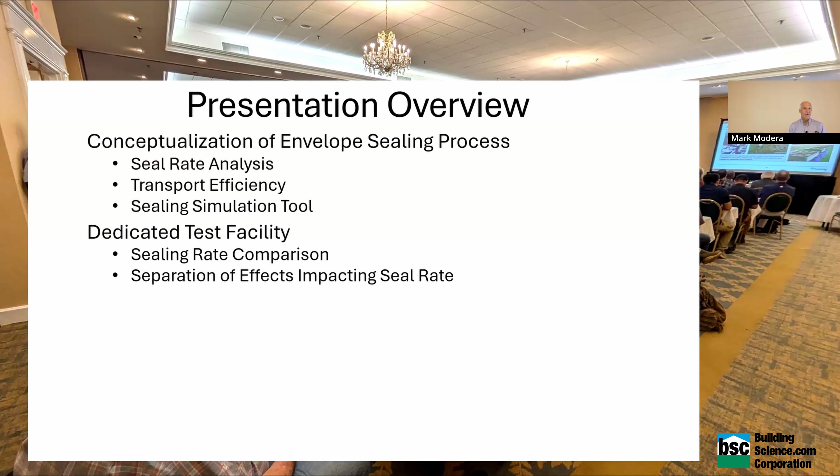Then actually, the kind of interesting thing is in academia, you're always fighting to try to get good technology to do your experiments and all that. I discovered that my job right now, I'm called Chief Scientific Advisor, which means nobody reports to me. I don't have any budget. I don't have any authority. But they all listen to me anyway, which is kind of cool. But I also get the CEO to buy me nice toys. So we got to buy a fancy particle analyzer, and we got to build a dedicated test facility for looking at Aerobarrier and figuring out how to make it better.

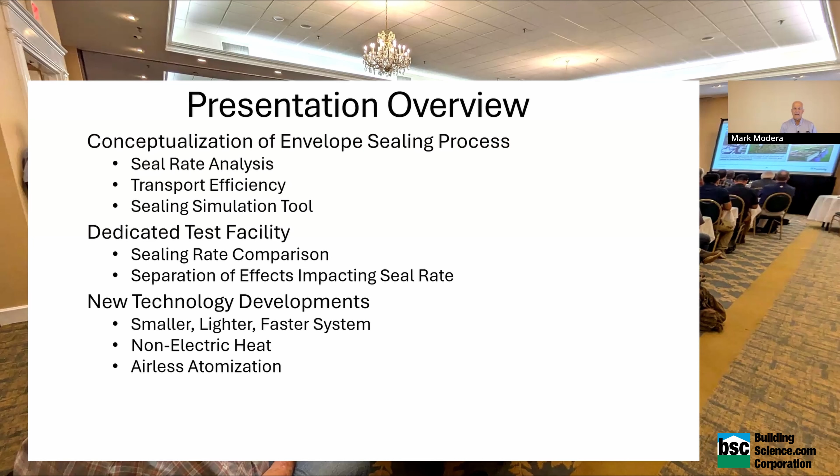I'll talk sort of about where the technology is going. Some of it is here, some of it is not yet. And then a little bit about some new applications. Okay, so this was in case everybody, when they didn't raise their hands, didn't know what it was.

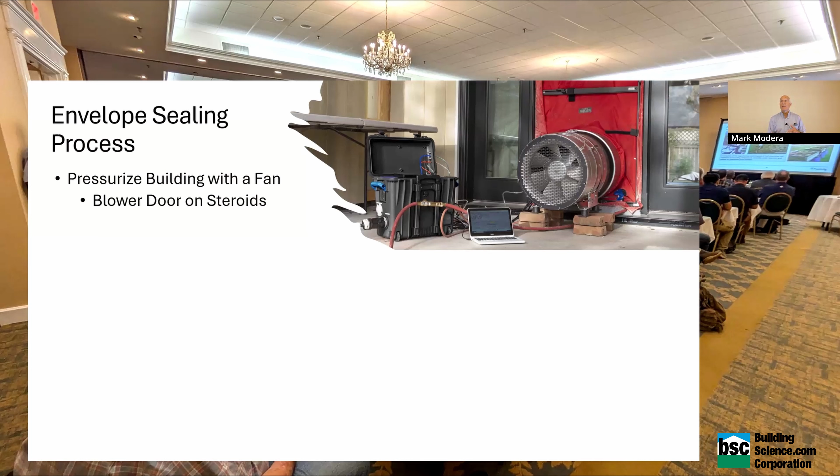So basically, you pressurize a building with a fan. It's kind of a blower door on steroids. And what I mean by that, it's able to produce higher pressures. Blower doors, people are talking about why do you have 50 pascals? It's because blower doors don't like going much higher. That's not true. But realistically, we sometimes want to make the building go to a higher pressure than that, and you have a different kind of fan, right? Instead of an axial fan.

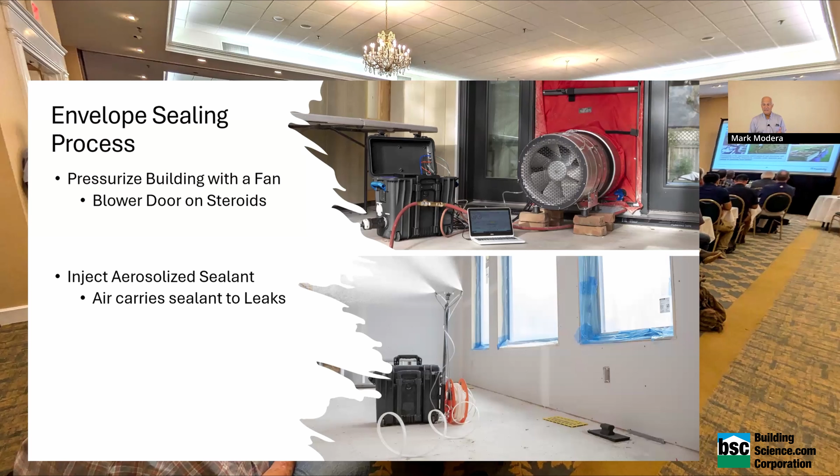And then you spray a bunch of sealant in the building. I mean, it kind of seems simple in concept. And then at the end of all this, or actually during it, you track what's going on. So this sort of taking data like that started in 1997. I have to do a sort of a shout out to Gary Nelson and Colin, that I went and stayed at Gary's house, and he worked with me a little bit because I just had this idea to do this stuff, and was like, well, we can track it.

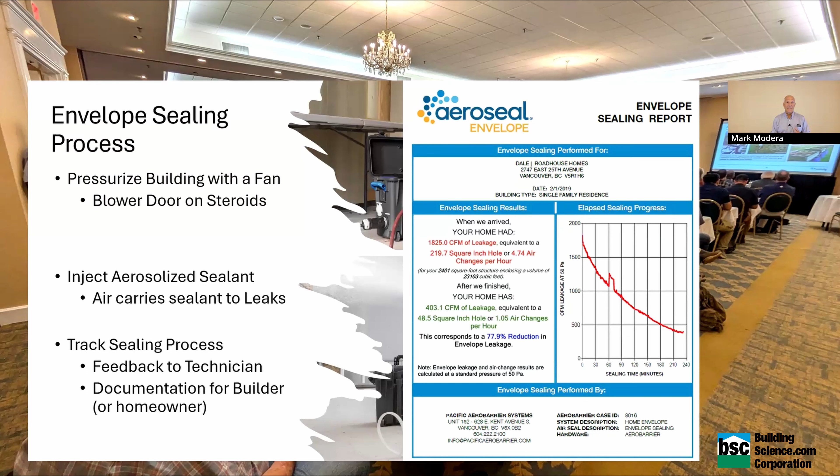And that has evolved into the point where the data on every building that ever gets sealed or every duct that ever gets sealed goes to a server, and we can now look at it and slice it and dice it however we want and figure out how things are going. I'm not controlling or anything. So conceptualization of the envelope sealing process. So this is, I got two equations, sorry.

So I just wanted to point out that if you want to know how fast something is going to seal, we want to know how those leaks have to go from a certain size down to 0 or close to 0. So the rate depends upon basically how fast I can dump sealant into the building. And that's determined pretty much by how humid it is, right? The sealant's water-based; if you try to evaporate too much water, it's going to rain, it's not going to work.

Then the next thing is you have to figure out how much of the sealant that you spray in there actually makes it to the leaks. And then once it gets to the leak, how much deposits? And then how much sealant do I need to seal that leak? And so it's a pretty simple equation, right? We're good with that? The reason I put it up here is I have to do this inside the company to explain to people to look at the big picture.

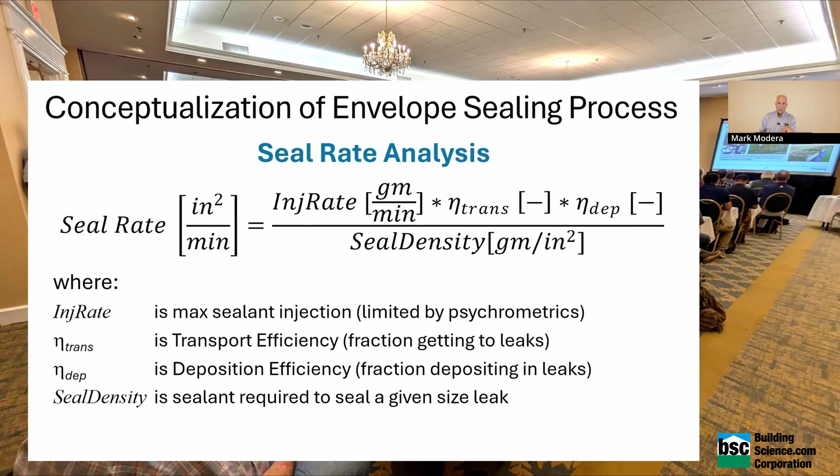I also realize that the way people think about things, they tend to look at the answer at the end. Like, am I faster? Am I slower? And I think that's pretty much useless unless you understand why. Because if you don't understand why, you don't know what to do, what to change, how to improve and all that. So we designed this facility to be able to measure all these different parameters sort of simultaneously to see what's going on.

So transport efficiency, this is a pretty simple concept. If you put a bunch of particles in the air, what do they want to do? They want to fall down. And you want to come up with a way to say, well, how much are they falling down versus going to the leaks? So if you basically say it's a race between getting to the leaks before they fall to the floor, you can actually turn it into a flux. So back to here, I think I go backwards, yeah.

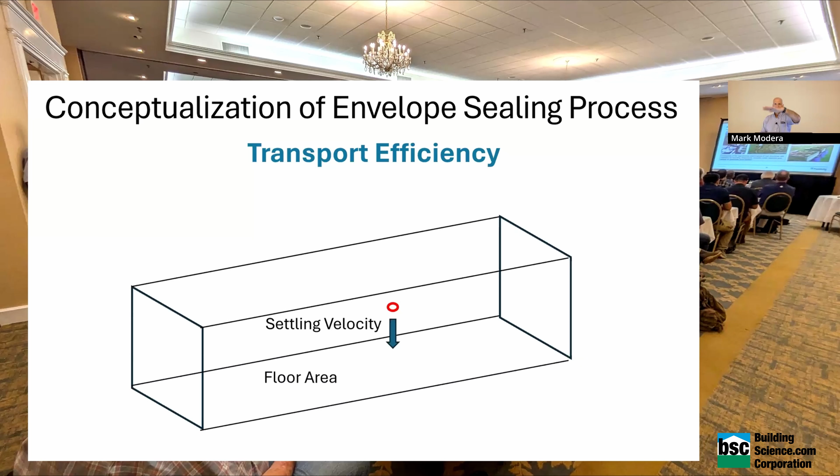Settling velocity is a speed. And you take a speed, multiply it by an area, and you get a flow. So you can say the particles are falling down at the settling velocity to such and such an area. And then you just compare that with how much is going to the leaks. Well, what's going to the leaks is exactly what you're putting into the fan. Otherwise, the building blows up.

So the end result is you get a simple definition for this transport efficiency. And we don't have to go through this, but basically the whole point is just to be able to compare apples with apples. And how do you do that?

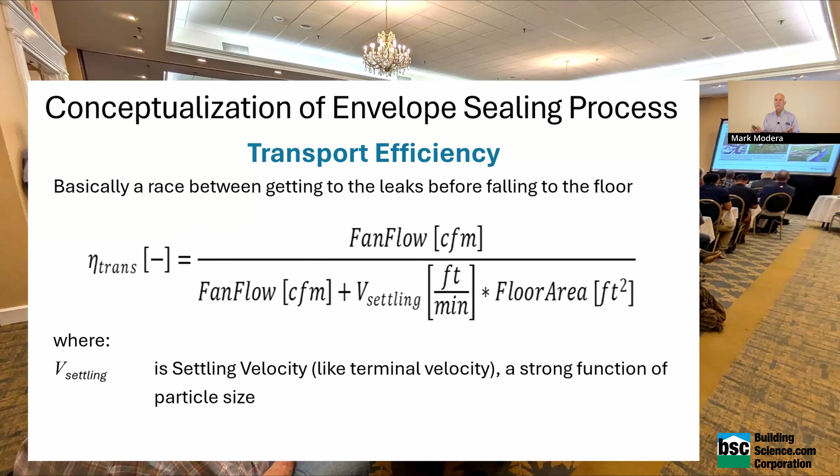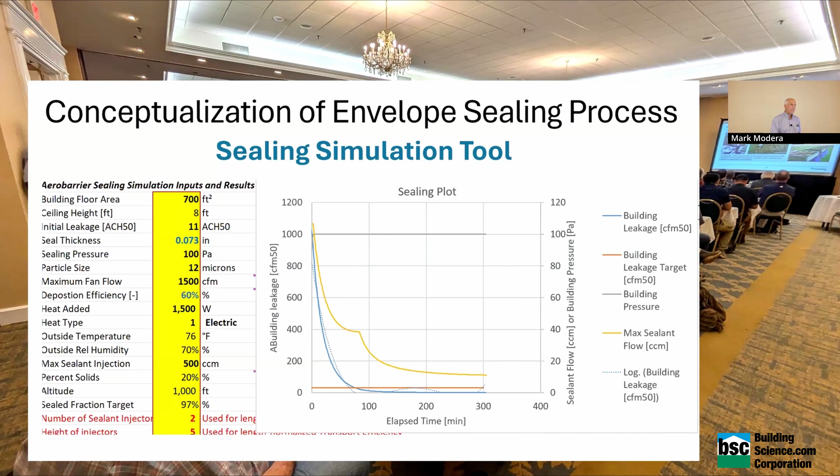So I get to do kind of whatever I want, and nerds tend to do nerdy things. So what I did is I developed a minute by minute or second by second, whatever, model to predict exactly what an Aerobarrier process would look like, and to adjust all the parameters, all the knobs you get to turn, and figure out when you turn that knob, what's going to happen. So I've got a model and I've got a test facility.

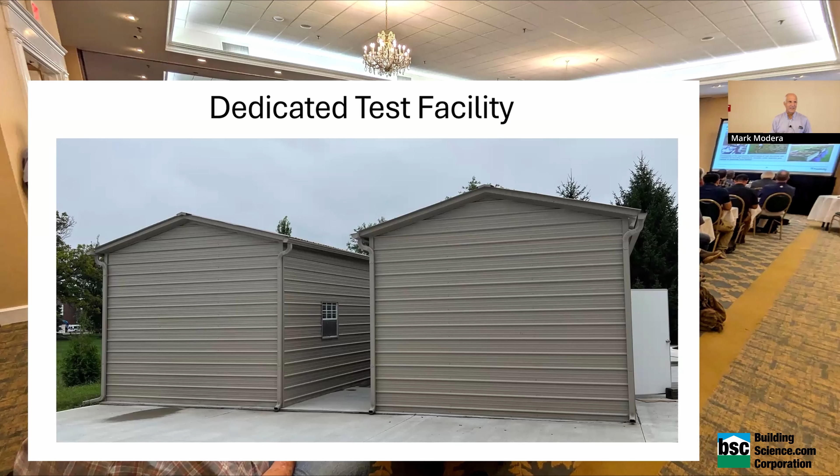So this was actually built. Someone had the bright idea that we should build 2 of them. We have enough to handle just running one of them at a time. So the second building just becomes a staging area. But basically we built a building within a building, and we put in a bunch of spots to put leaks. And basically they just clamp in and out.

And in addition to putting the plates so that we have the leakage and we can take them in and out and measure them and change them and clean them and all that, to measure that transport efficiency, we came up with sort of a cheapo way to do a personal particle monitor. So basically you take a vacuum pump, you put it onto a little box, and you suck the air through a filter on that box. You weigh it at the beginning and at the end, and you've got the average concentration during your job.

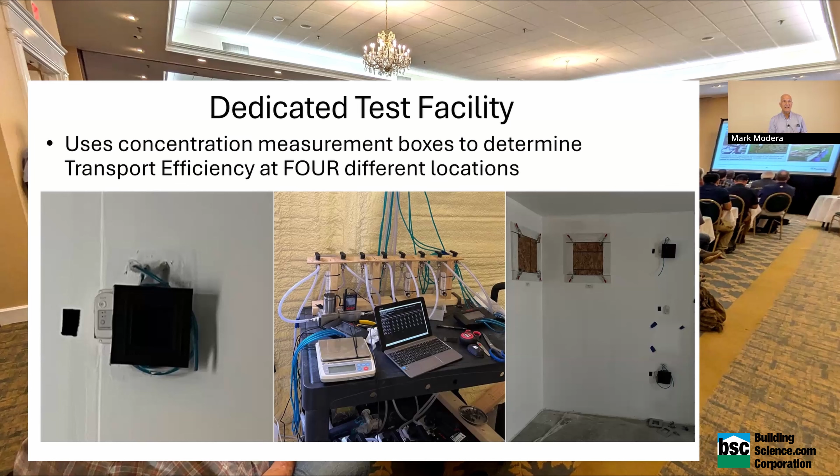And even came up with something that I just filed a patent on, is the idea that you could not only get the average concentration, but you can get the minute by minute concentration, instantaneous concentration from that same box. So I said, go ahead. The filter. I mean, if you have a super, super deluxe scale, I suppose you could weigh the box, right? But it's much easier signal to noise to do the filter.

So these are leaks. And so we make all the same, like there's 20 plates of leaks all through the building. And you'll notice they're made of aluminum. So we also weigh these plates. So we have a scale that's good enough. You can weigh the entire plate before, and you can weigh the entire plate after, and you can figure out exactly how much sealant was required to seal those leaks.

The interesting thing that's not in the picture is we started out with, I guess it was pressboard. And there's a real problem with pressboard, as most of you in this room probably know, which is you weigh the plate before and you weigh the plate after. However, when you're doing the sealing, there's all that humidity in the air. So the plate takes on humidity. Then you have to dry the plate. And if you keep on drying it, you get this exponential curve, not all that much fun. So we threw out all those plates and switched over to aluminum, which I know is not as representative, but is much easier to deal with.

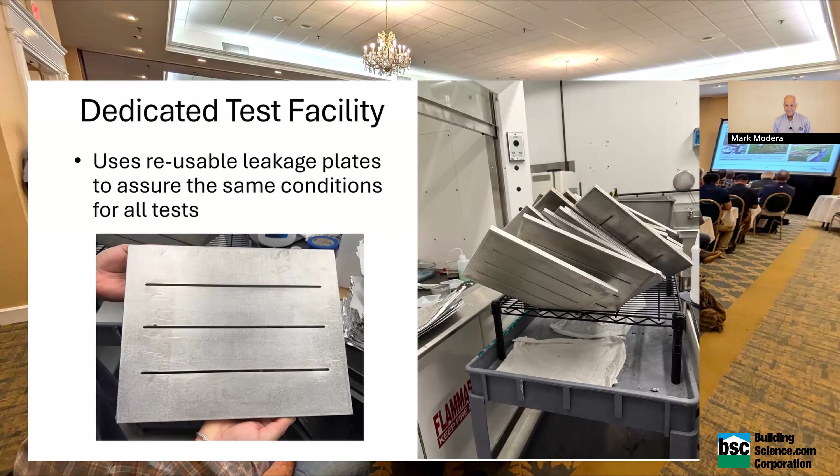Basically, I said all this. We also weigh the sealant, so we know exactly how much sealant went into the building. We know the percent solids. I have this much mass and that much mass.

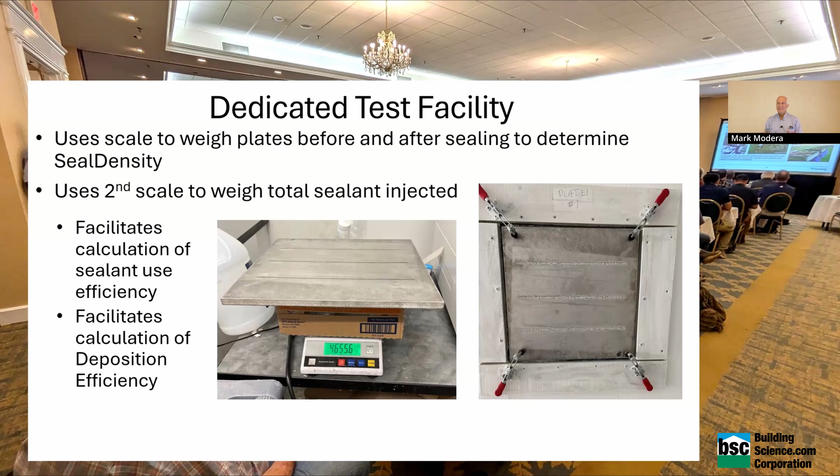There was one other point I was going to make. We talked about embedded carbon, and somebody, his name is Mike Lubliner, asked me, so what's the embedded carbon of your little aerosol thing? And I decided to ignore the energy you use when we're applying it, but in the actual sealant itself, I think we use somewhere between 1/10 and 1/100th of the amount of mass of sealant to seal the leaks, because the sealant goes where you want it to go, as opposed to having to put in like 10 times as much as you need to close the leak. Now, there's a whole thing we could debate about that, but we're not going there right now. Anyway, in terms of materials, it's a much smaller amount of material.

So technology developments. So this is kind of what the system looked like. It had a 220 volt fan. This thing that says Vanair on there, I discovered that we built this. I wasn't paying attention. It is a giant compressor diesel set where you're burning a bunch of diesel to generate electricity, to warm up the air when you put it into the house, and to run all these compressed air lines.

And it struck me as being incredibly dumb to burn diesel, create electricity, then go take the electricity and turn it into electric resistance heat. So a very simple improvement was, why don't we burn the diesel right in the air that we need? And so the end result is, we wound up saving 35% of the weight, a whole bunch of volume, and everything became a lot easier to deal with. So that is currently available.

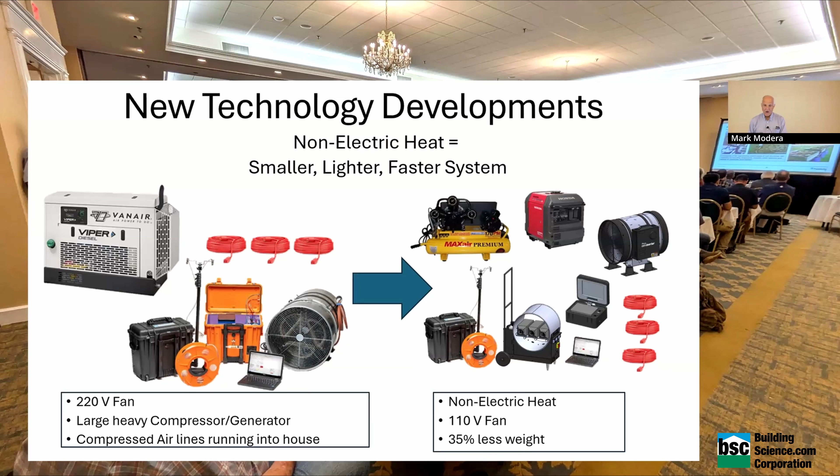The next idea was, when you want to make aerosols, there's sort of two ways. If anybody does paint spraying in their house, there's an air and there's an airless. And air is easier to control in some ways, and you can control the pressure, et cetera, but you have all those tubes you have to run into the house. So the idea was, if we could switch to doing an airless system. The idea being, we don't have to run the compressors, we don't have to run the tubes, any of that stuff. And now you can fit everything almost in a pickup truck, right? Much better way to do things.

There are problems with doing that. Everybody here knows when you have a technology and you've been working with it for 20 years and you have a new one and you start doing that, it doesn't take like 10 days to make it work, right? And so it's been a challenge for me to get people to realize that it's worth the extra effort, because it makes bigger particles. There's all these things that you have to deal with.

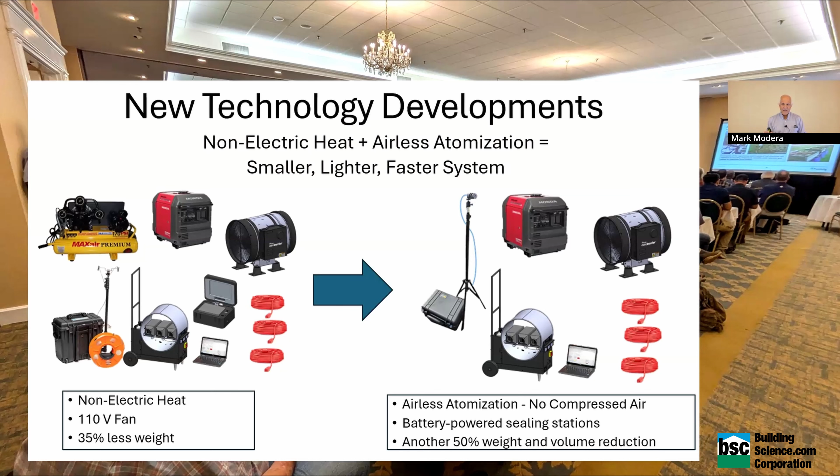So I'm going to shift gears one more time and talk about the test facility, and I'll get back to the air versus airless. So in this picture, what I'm showing is we put 4 of those boxes on the walls of the structure, and we measure the concentration.

And what you see, let's see if I could, do you see my cursor? Yeah, I think so. Oh, no, you don't. No, sorry. All right. And I can't point at anything, so I'll wave my arms.

There's a box at one end of the building, a box at the other end of the building, and a box in the middle. So if you look all the way to the right in the picture, it says north over south. Those boxes should be giving the same answer, right, if it's symmetric, and they kind of are. And the one that says middle is higher. You have a higher concentration there.

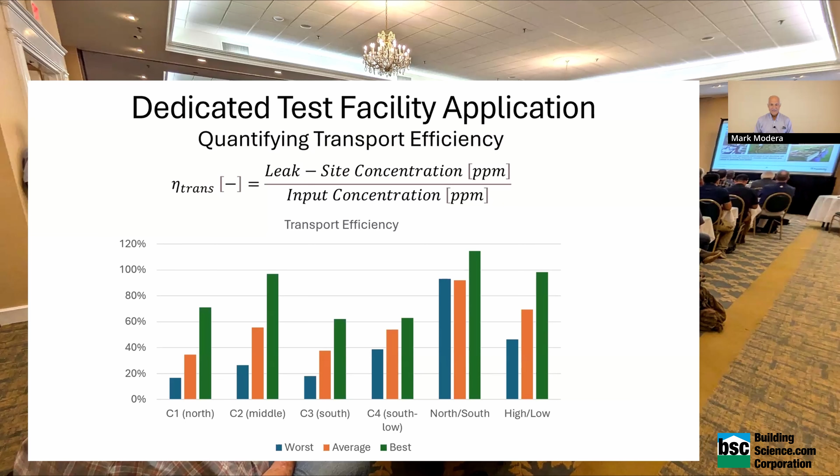But the other thing we discover is that if you put it high up on the wall or low on the wall, you get a different answer. Not a big surprise, but you want to quantify it. And so I came up with a very easy way to quantify it and figure out, when you go from one test to another, when you turn a knob, how well it changes the transport, how well it changes the top to bottom, all that kind of stuff. So it's kind of fun. Okay, so

here's our lab. The plot, if you'll notice, looks different than the plots you're going to see for Aerobarrier, and they all go like this. And this one kind of does like that. Part of the reason is that leaks in buildings are somewhat random in terms of their size and shape, whereas the leaks in our chamber are all exactly the same. And how well you deposit in a leak goes with the square of the size of the leak. So of course you've got the net equation, you've got things fighting each other. And this is exactly what it should look like if all the leaks look exactly the same, the kind that we made. So this is with a compressor.

And then we did airless. Well, let's just say that people don't think this is a good thing. It now takes longer to seal. However, a magic thing occurred, and we now have airless. This is in the space of a month, right? We turned a bunch of knobs. This is showing 3 tests. We did 21 different tests and figured out how to make it happen. So this is kind of cool because when people are telling you no, something won't work, or no, this is stupid, and you get to kick their butts, I like that stuff.

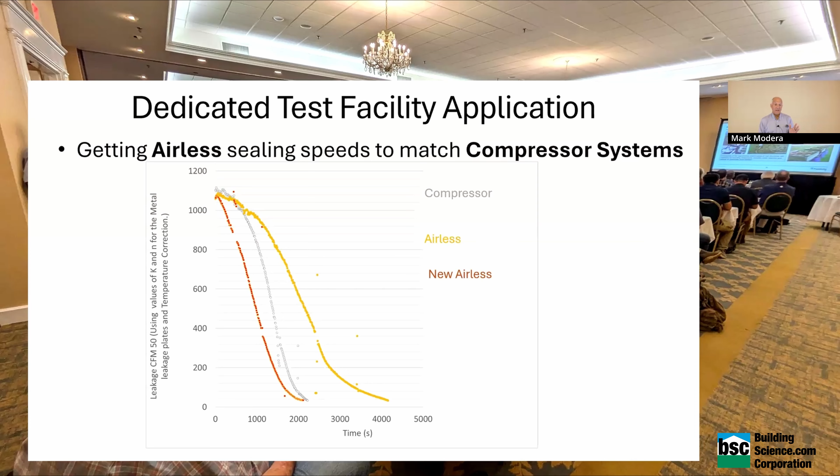The other thing we found, this was hot off the presses from last week, well, this we knew: it saves about 20 minutes on setup and cleanup without having to run all the tubes everywhere.

But it had longer injection time, so it was not really winning. But last week, it showed shorter injection times and still got the 20-minute savings, so Mark wins.

Okay, so I'm going to shift gears. I've only got a couple more slides, and then I'll leave everybody alone.

Ceiling plenums, which this room is actually not a good example of. Most of the time, most places you go have a ceiling plenum return, and right here we do not. But everybody here knows, and raise your hand if you know what a ceiling plenum return is. No, if you don't know. Okay. It's a negative. I go with negative questions all the time.

So basically, one of the things I discovered was that those things can leak to outside. And in fact, it's a negative pressure. It could suck in outside air. So we tried to figure out if we could seal it. And the nice part, you're going to hear more about existing buildings, about attic sealing. But a ceiling plenum, you can basically think of it as I can put my injectors up there, and then I can pressurize the room, and the air goes up into the ceiling plenum and blows the particles out of the building.

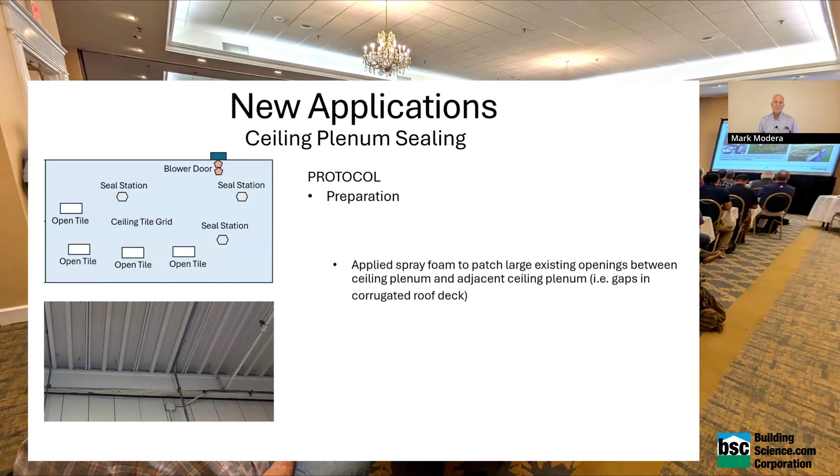Now, this picture at the bottom, that's unfortunately what the top of a building looks like, with those corrugated roofs and those big gaps. And you can seal those somewhat, but they're not trivial to do. Anyway, long story short, we put in some stations, we ran the thing, and so this shows that we actually did it instead of just drew pictures. And the results were, we sealed about 300 CFM50. Not a lot, it's not a big space, right? So we sealed some, but we stopped it because there was some fogging of the occupied space.

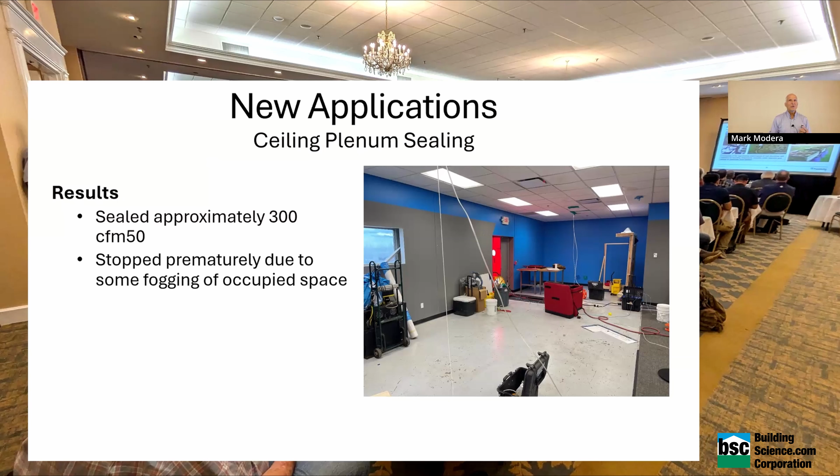So the thing we learned was that you shouldn't be doing it while everybody's at their desk, right? We should have known that, but someone decided they would try anyway. I wasn't there. But what we did figure out is it's not enough fogging to cause any deposition that anybody would care about in those rooms, but it was enough fogging to have people be like, what's going on here? And remember, particles are the enemy. So I'll call that mixed results.

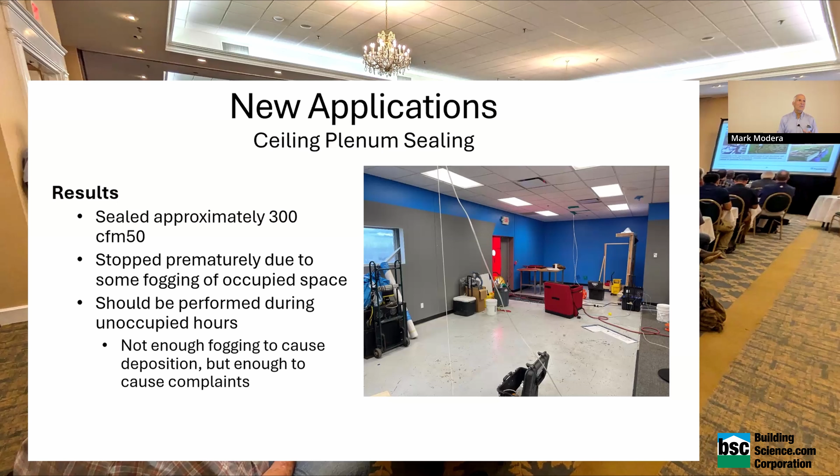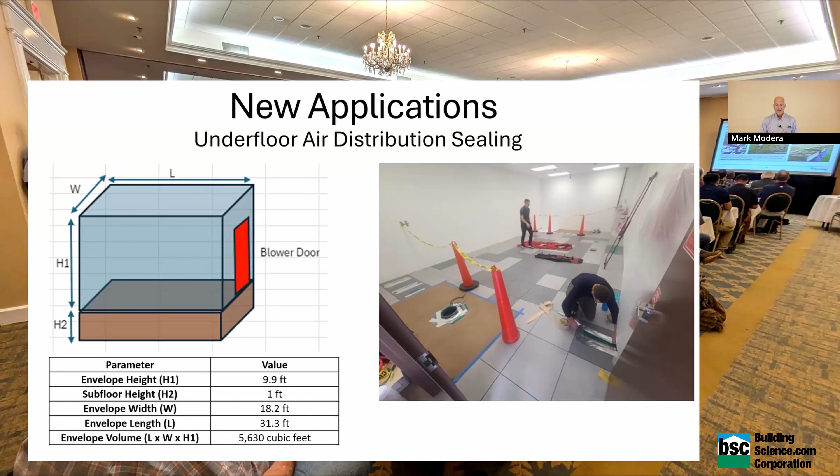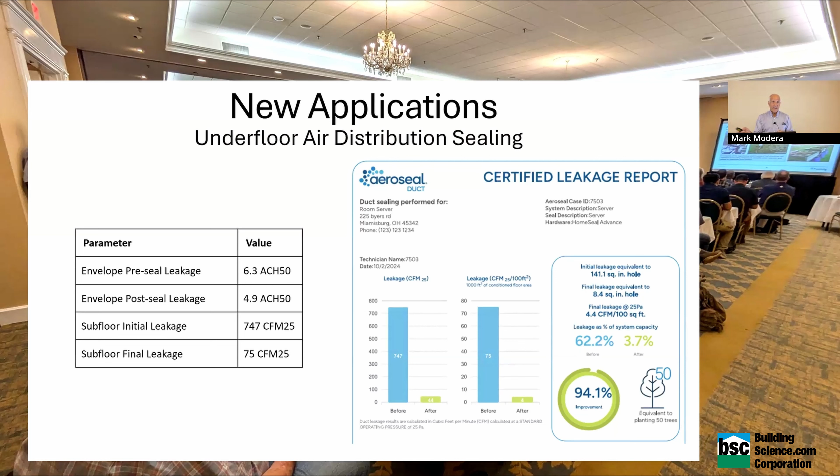And then one more application was to do an underfloor application. Basically, like in a computer room in a data center, they tend to do a raised floor and put all the stuff under the floor. And this turned out to be a piece of cake. We basically even just used a duct sealing machine to pressurize underneath there. And so the results were, we sealed, I don't see how much time it was on here. Well, sealed 90% of the leakage, and not only was it leakage to the room, but it was leakage to the outside. We did a blower door test before and after of the room. Okay.

So I promised to quit and I will. So the takeaways from what I feel like I brought across today is that I think we came up with a really nice facility. And if you have any bright ideas that you'd like to see somebody try out, we can test it. Unfortunately, we're in a happy spot now of having more ideas of how to make it better than we have time to do it. So now we have to prioritize things, it's a really good problem to have.

What's cool is it separates out the factors influencing performance. I'm going to declare victory that airless envelope sealing is the future, well, relative to air-based envelope sealing. It's not the future of everything. And then I talked about new applications, and I finished with like 2 minutes to spare. So I can take questions now.